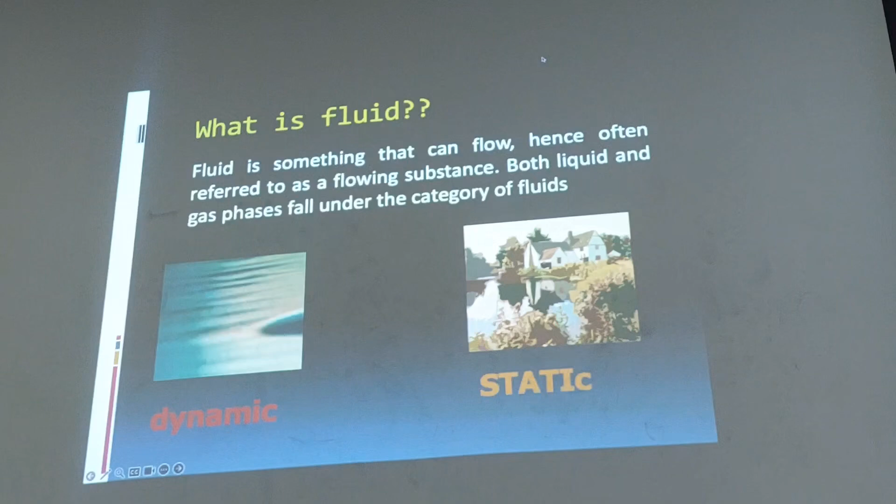The first topic is static fluid. I believe you already know about examples of fluids. Fluid consists of two types of material: the first is liquid, and the second is gas. Both of them we call fluid. So fluid is sometimes liquid and sometimes gas. Today we will discuss static fluid.

Why do we divide it into two sessions? Because static and dynamic fluid have so many different ways to explain. We know that dynamic fluid will flow according to its channel, while static fluid will remain in place inside the channel. So we can see that in static fluid there is no physical movement, but at the molecular level there is still movement of the fluid molecules, both in gas or liquid.

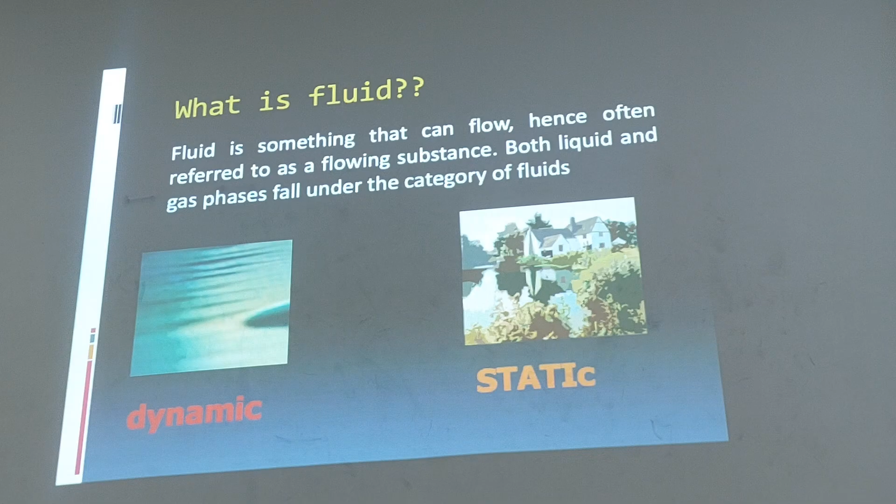For example, if you go to a nice place like a lake or a pool, and no one goes inside, we can see the water will remain calm with no flow anywhere. In this case, the fluid condition has no flow and remains in its place, so it's called static. When there is no movement, we call it static. But if there is a flow, like in a river or the sea, the fluid will be dynamic.

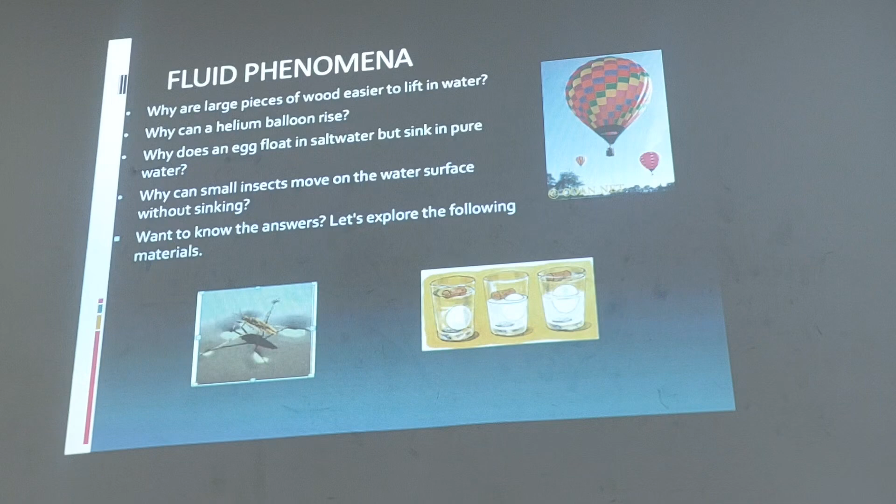The other example, if you have an egg, sometimes you put it inside a bowl or a glass. Sometimes the egg floats, but sometimes it sinks until it touches the bottom. But sometimes the egg floats or is submerged between the surface and the bottom. It depends on the egg's condition. A good egg usually floats between the surface and the bottom.

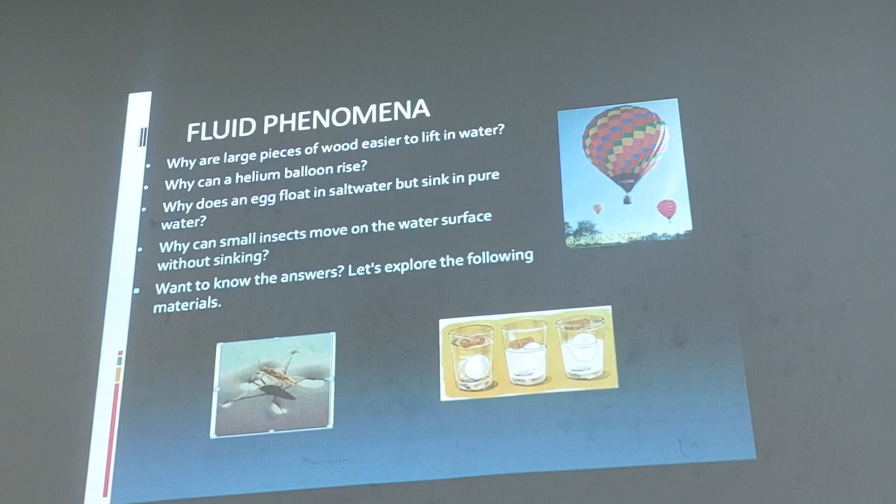But sometimes a bad egg, maybe kept too long in your house or refrigerator, becomes broken. So when you put that egg inside water, it will float until it reaches the surface. That's the simple way to separate a good egg from a bad egg. If you buy, for example, 5 kilograms of eggs and want to separate which are good and bad, just put them inside water. The egg floating on the surface is the broken one, so please do not consume it because it's already broken or expired. But if the egg sinks or floats between the surface and bottom, this is the good egg. That is a simple way.

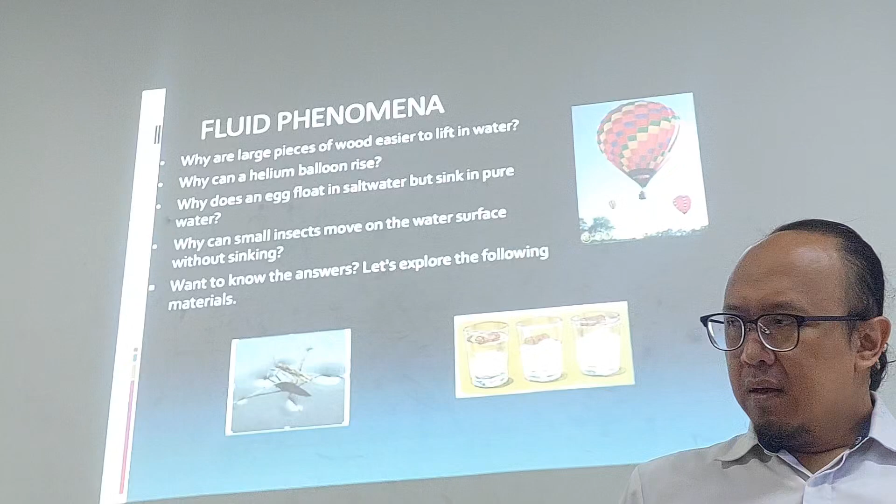The other example is some insect. I don't know the name of this insect. Long time ago, I often saw this insect in the rice field. When the rice field was filled with water for irrigation, I saw this insect floating on the surface of the water, and it cannot sink. It can move easily at the surface of the water without sinking. I don't know why this insect can do that, because if I put my leg into water, I would directly sink. But this insect can stand and stay at the surface of the water.

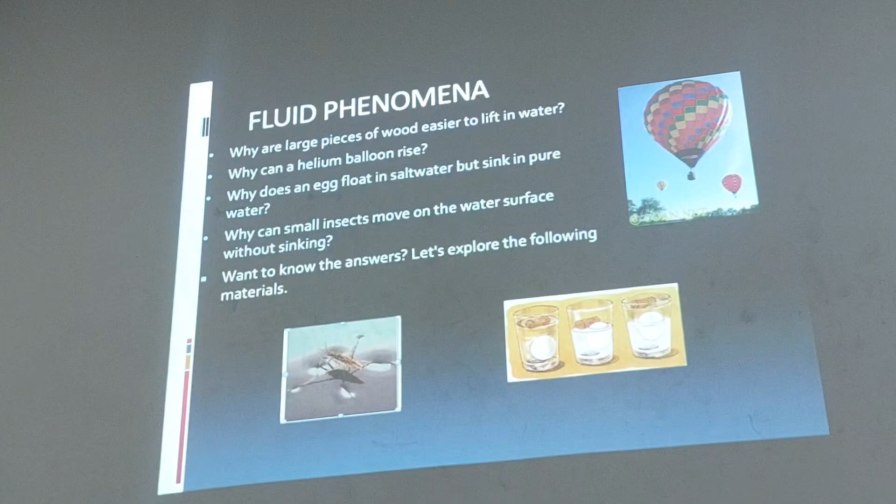So these are some phenomena of fluid. In our first discussion about static fluid, the environment of the static fluid will be limited to its place. For example, for the gas balloon, the environment of the gas is limited inside the balloon, and this volume of gas will not come out, nor will anything from outside come inside. Also, if you fill some water or fluid inside a glass, this is the limited environment for the static fluid.

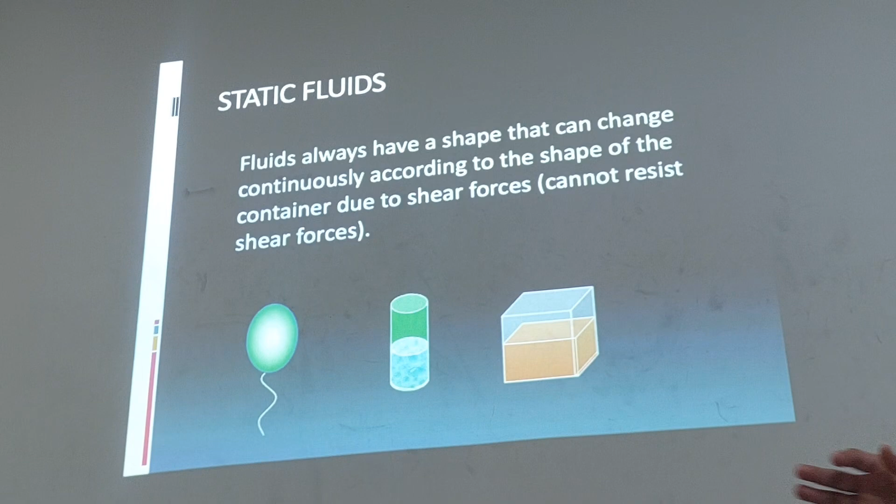The fluid can easily change its shape according to the place it's in. Also, fluids cannot resist and stay above the shear force. That's why, when we previously discussed the density of material and looked at the shear modulus of fluid, there's an empty value. The shear modulus value is empty for fluid conditions because fluid cannot resist shear force.

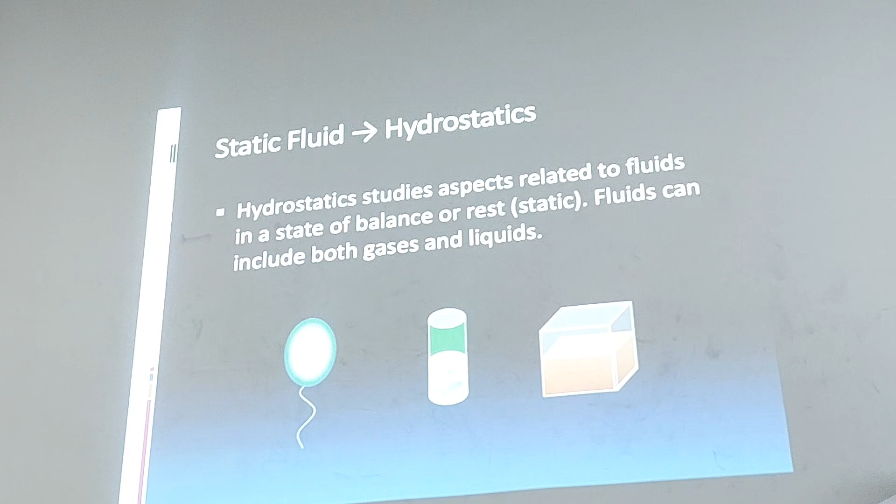Inside the static fluid, we found the potential energy about the fluid, and also some special force inside the fluid we call as the hydrostatic force. Every fluid will have this hydrostatic force.

So if we say about hydrostatic, this is force inside the fluid, and the condition of fluid is in liquid, because in gas there is no hydrostatic. So it's have a different parameter. For the liquid, why it has a hydrostatic? Because the liquid was incompressible.

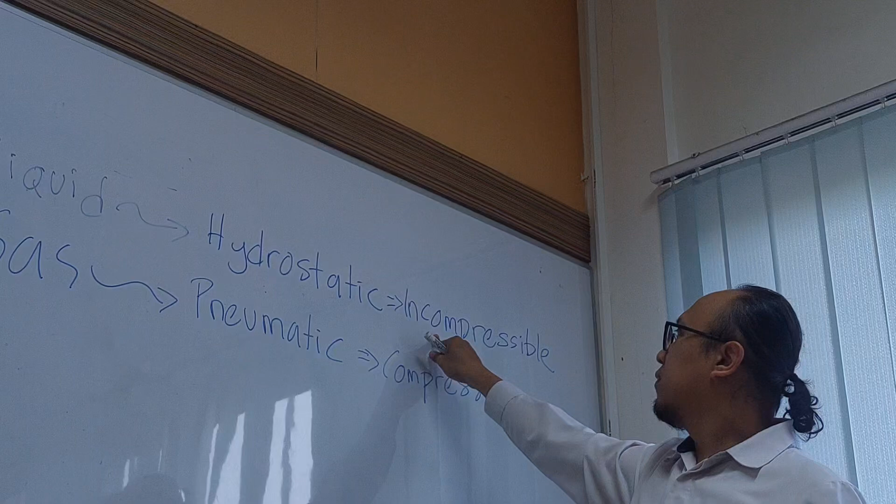Liquid was called hydrostatic because it has the parameter of incompressible condition. So when you give a force to the liquid, it will be spread or given to another area, another point, with the same amount of force. But in gas, in pneumatic condition, the gas condition was compressible, so you can fill so many volume inside a place of gas without the gas expanding anywhere.

For example, we can see your motorcycle tire or sometimes car tire. You can add some volume of gas, and the pressure inside the tire will be higher, but the volume will be similar. But if you give more and more, your tire will be higher because the tire will have high pressure inside.

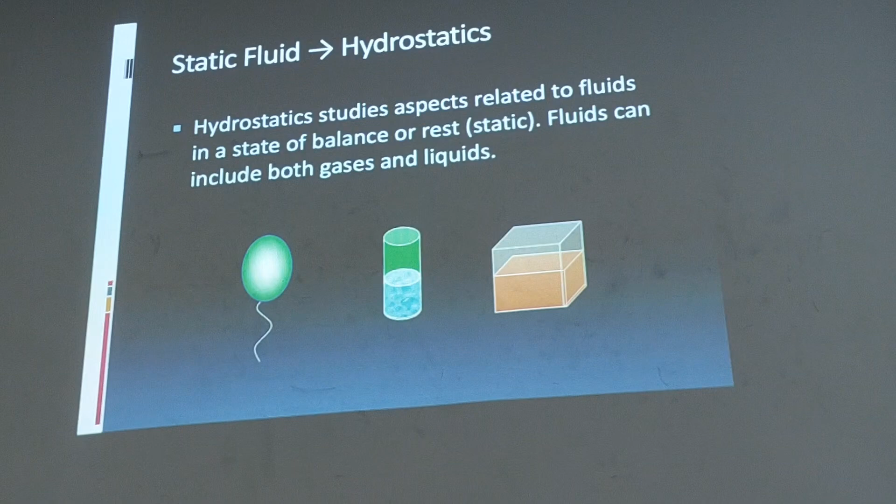But you cannot do the same way with liquid. If you fill your tire with liquid and give pressure, the liquid inside your tire will easily blow up because liquid was incompressible. It will find a way to separate and distribute the force. So this is the difference between liquid and gas.

In a liquid condition, we can verify using some experiments, and based on those experiments, we can see that the molecules of the fluid are loosely bonded to remain close together. It's easy to change the bonded molecule, but it's also easy to gather with another molecule in liquid. Also in liquid condition, when the pressure arises, it will also give the same value of force in every circumstance.

And the pressure in a liquid is perpendicular to the surface, so this is also what we call normal pressure. In gas fluid condition, the molecules can move freely, and they also easily collide, sometimes with friction, with another molecule of gas. The level of movement of gas compared with liquid is greater - the molecule is easiest to move everywhere compared with liquid.

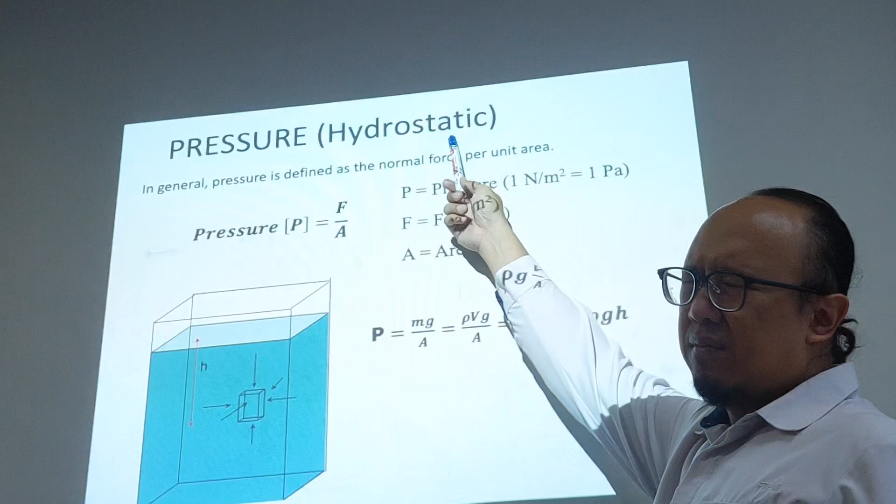In a liquid condition, we call this hydrostatic pressure. We will formulate the pressure of hydrostatic. We can get this from the basic equation of pressure, which we also used in our previous lecture class. So the pressure is equal to force divided by cross-section area. This is the basic equation.

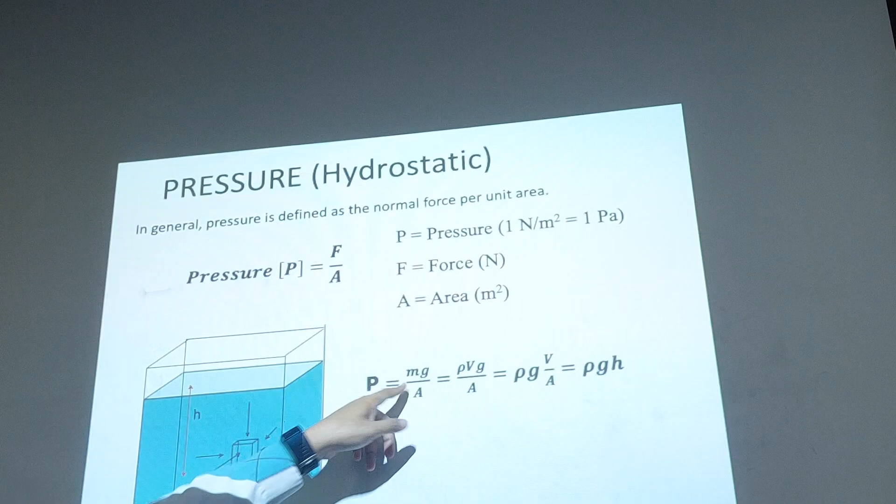From this basic equation, we can differentiate into another form, because force we can get from mass crossed by gravitation acceleration. So force is equal to mass crossed by acceleration of gravitation, divided by cross-section area. And mass we can also get from the density, which is equal to mass divided by volume.

So we can get for the mass, it comes from density crossed by volume. So we substitute the mass to become rho, or density, crossed by volume, and don't forget this is multiplied by gravitation acceleration divided by cross-section area.

Density and gravitation acceleration will not change, but volume and cross-section area sometimes change according to the place or shape. So volume divided by cross-section area gives us h, and h is the distance.

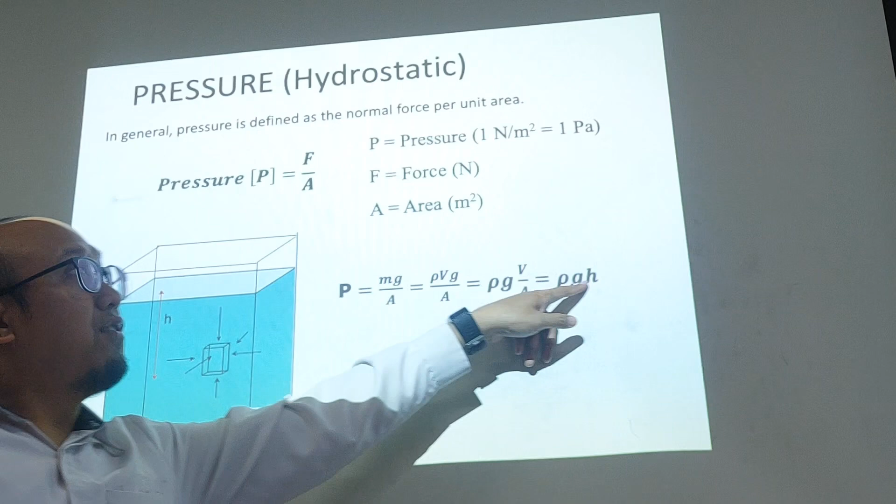But please pay attention, the distance of the hydrostatics is measured from the surface, not from the bottom. So h, this distance, is measured starting from the surface of the liquid. For example, if you put some box or material inside the liquid, at this point, the pressure you will get from the equation: density crossed by gravity and crossed by h. H is distance, and this distance is measured from the surface.

So when you change the distance of this material deeper inside the liquid, because the equation is rho, g, and h, when you move this material deeper inside the liquid, the pressure will also rise.

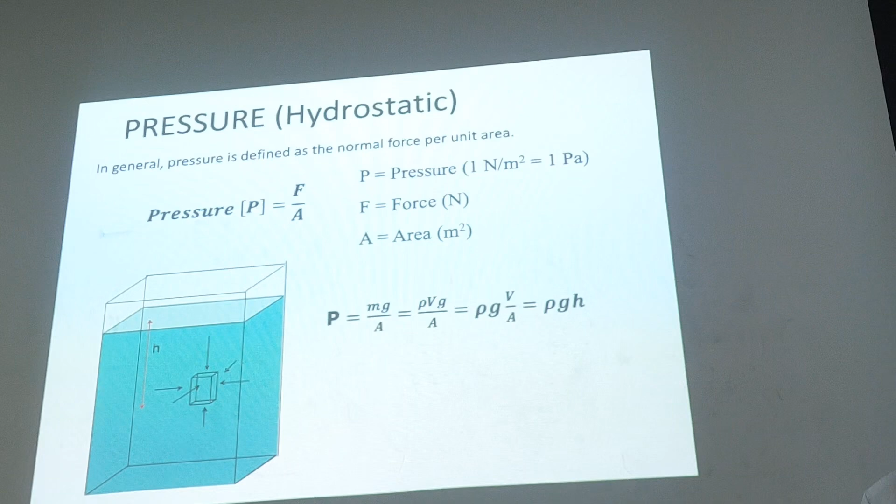That's why when you're swimming, maybe for human normal condition, maybe you can only swim 10 meters. After that, if you insist on diving deeply, you will feel pain in your ear because the pressure of the water will rise according to this equation.

So if you dive deeply, your body will have a higher pressure as you go deeper. The pressure will attack your body, especially your soft body parts, for example your ear membrane. This is one of your soft organs, and also your eyes, which is also a soft organ. So the pressure will firstly impact your soft organs.

That's why if you go diving, you have to use special equipment, for example special earplugs for diving. You also bring a pressure gauge, so you know the limit of the pressure when you dive safely, so your body will be safe when you dive.

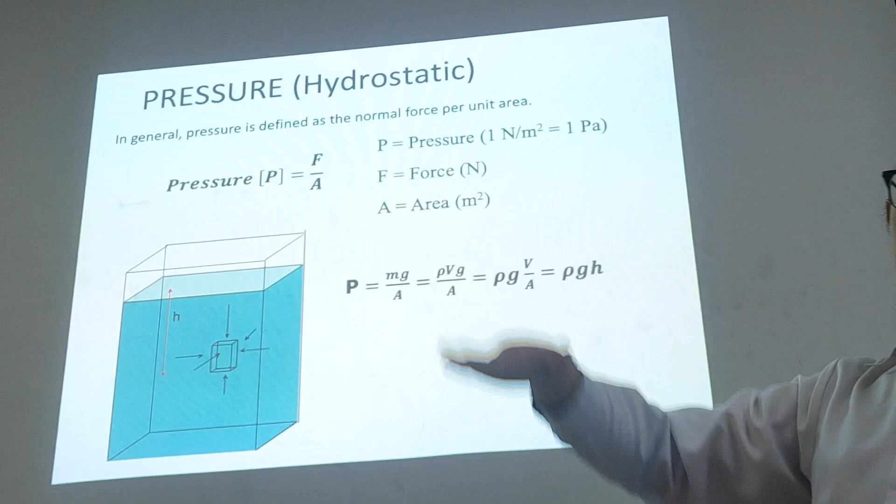Hydrostatic pressure is equal to rho, G and H. So at the same level, the same distance from the surface, the pressure will be similar. If you change position to this point, or any point at the same distance from the surface, the pressure will also be similar. But if you go deeper, the pressure will be higher than before.

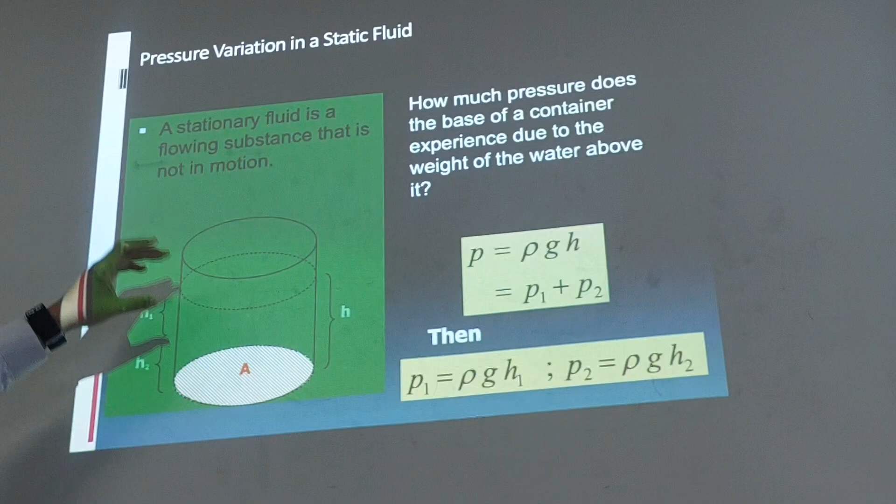Another example of hydrostatic fluid: you put two types of liquid, for example water and oil. If the oil density is higher than water, the oil will stay at the bottom and the water on top. But if the water density is bigger than the oil, the water will stay at the bottom instead of the oil.

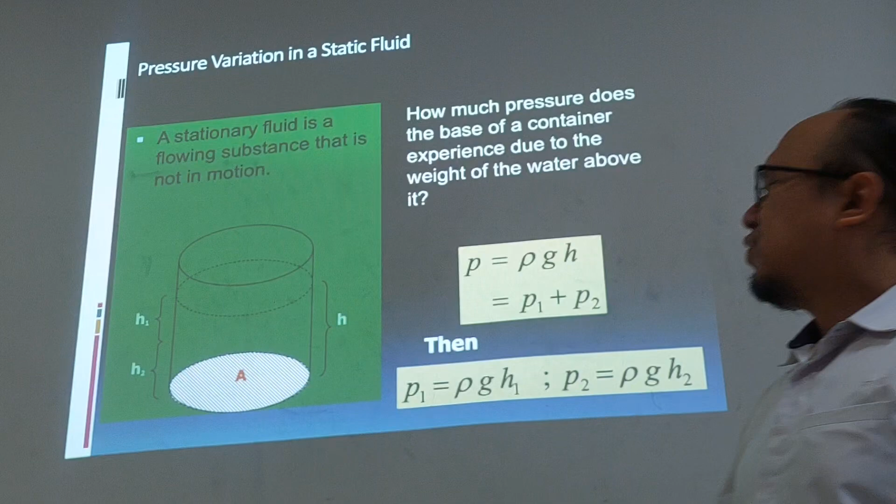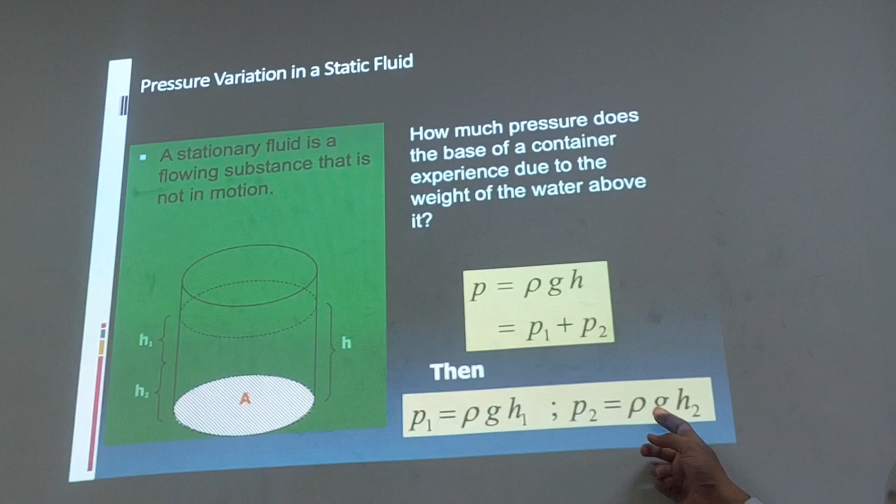In this condition, if we put two types of liquid in some place, it also has different pressure according to the depth from the surface. We know that pressure comes from rho, G and H, but since this is two types of liquid, water and oil, the pressure will be divided into two types, P1 and P2. P1 and P2 are separated by a specific distance from the surface of the liquid, so we have to calculate them one by one. For example, P1 we get from rho, G and H1, and P2 we get from rho, G and H2, because this is two types of liquid.

This is the example: a cylindrical drum with a 50 centimeter radius, the top of the drum was open, and the drum was filled with kerosene up to 80 centimeters. If the density of kerosene is 0.8 gram per centimeter cubed, it means that 0.8 is less than water density, because water density is 1 gram per centimeter cubed, but the kerosene is less, 0.8 gram per centimeter cubed, and the external pressure is 1 atm.

So this is the kerosene, and the top of the drum was open, so there is also some pressure from the atmosphere. Inside the drum, because it is filled with kerosene, this is the hydrostatic pressure, and outside is the atmospheric pressure, which is 1 atm.

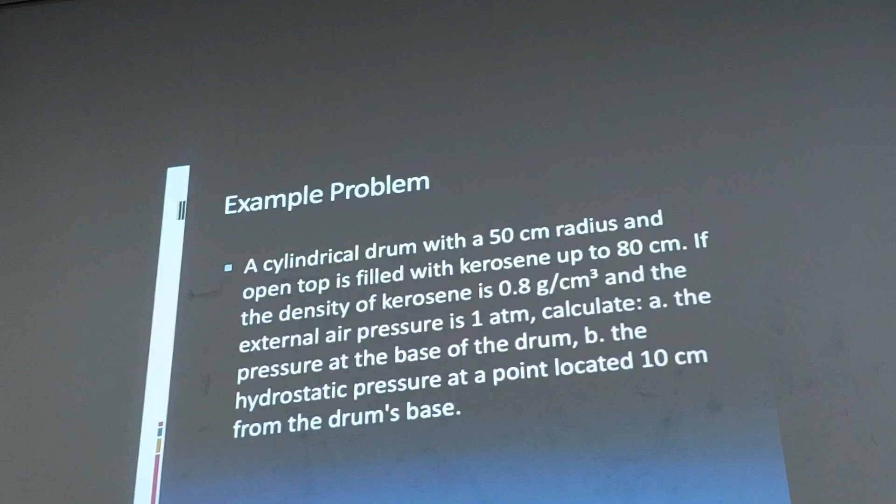Calculate the pressure at the base of the drum. So this is point A, the pressure at the bottom of the drum. And B, the hydrostatic pressure at a point located 10 centimeters from the drum base. So for example, this is point B, and point B is 10 centimeters from the bottom.

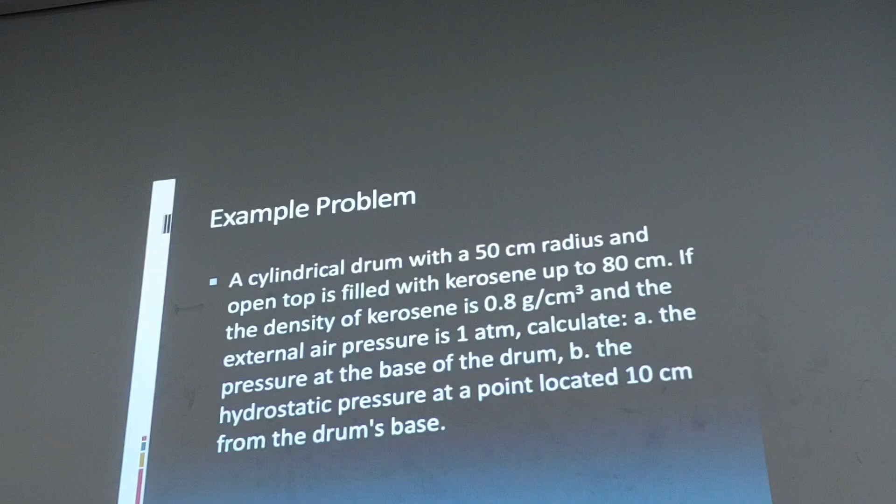So a drum filled with kerosene, and you have to find how much pressure is at point A, at the bottom, and how much pressure is at point B, 10 centimeters from the bottom. There are two types of pressure: atmospheric pressure and hydrostatic pressure.

For the answer of A, the question asks about the pressure at the base of the drum. Because if A is asking about pressure at the base, it means the total pressure consists of atmosphere and hydrostatic pressure. That's why at point A, or at the bottom of the drum, the pressure is divided into two types, hydrostatic and atmospheric pressure.

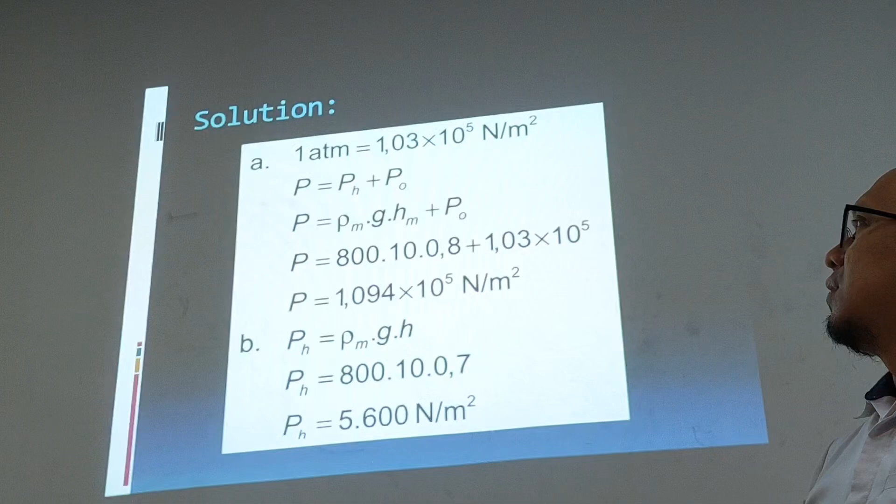The hydrostatic pressure is found from rho, G, and H. Rho is the density of the kerosene, which is 0.8 gram per centimeter cubed, so we transfer into kilogram per meter cubed, and it becomes 800 kilogram per meter cubed. The gravitational acceleration we use is 10, and the height at the bottom is 80 centimeters.

So we must change to meters, so it becomes 0.8, plus 1 atm, which is equal to 1.03 multiplied by 10 to the power of 5.

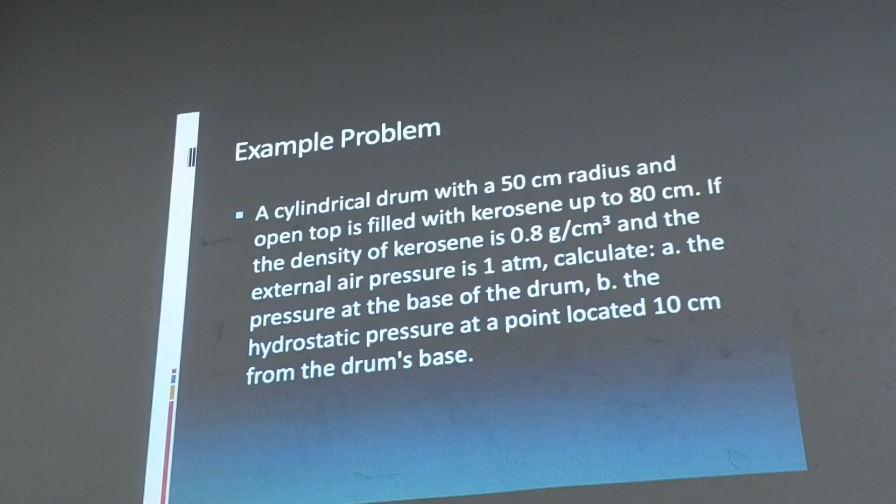And the second, B, the hydrostatic pressure. This is only hydrostatic pressure, meaning only the pressure inside the liquid. No need to calculate with the atmosphere. We're only asking about the hydrostatic pressure at a point located 10 centimeters from the bottom. So we can use only the hydrostatic pressure formula: Rho, G and H. Rho is 800, similar to this one, multiplied by 10.

This is the gravitational acceleration. And H is 0.7. Why 0.7? The point is 10 centimeters above the base, measured from the bottom. Or from the surface? Because the point from the bottom up is 10, and we would make it like 80 minus 10, which equals 70. Because we should measure from the surface downward, not from the bottom up.

So just remind that H will always be measured from the surface, not from the bottom. That's why if this point is 10 centimeters and the total depth of kerosene is 80 centimeters, H equals 80 minus 10, so it will be 70 centimeters or 0.7 meters.

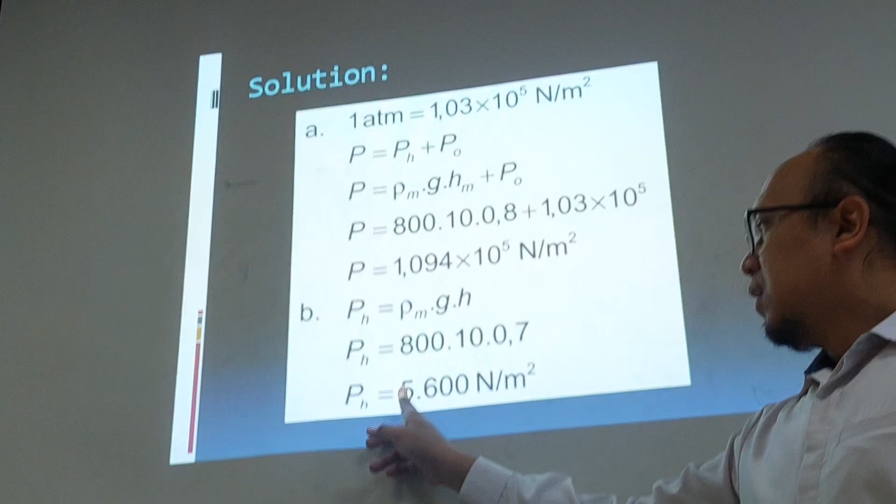So the hydrostatic pressure at this point, point B, will equal 5,600 Newton per meter square. So this is the pressure at point B.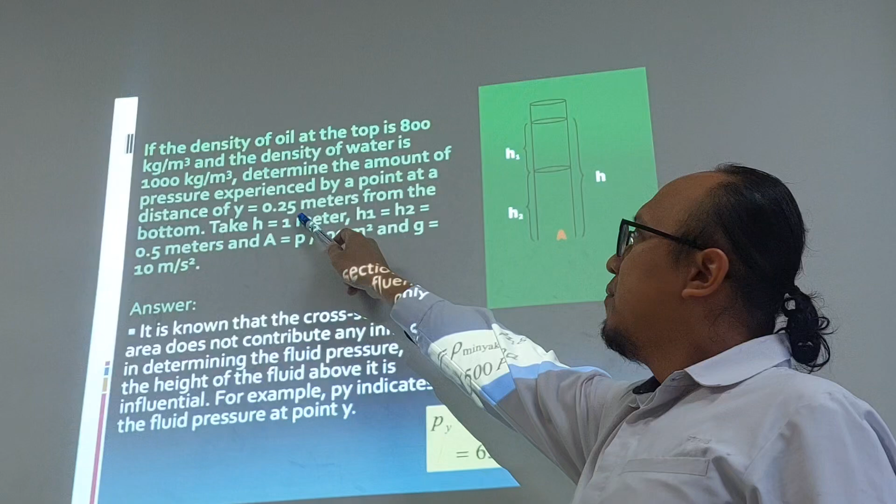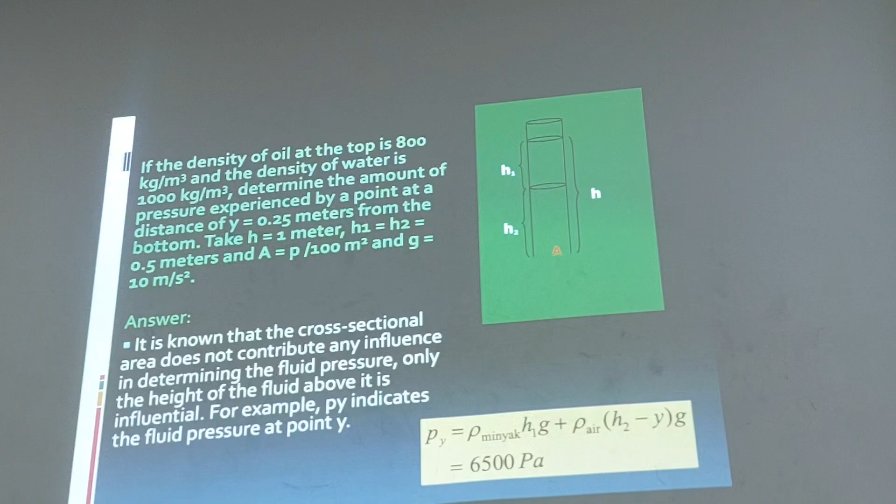And take H1 as 1 meter. Take H as 1 meter, H1 and H2 equal to 0.5. So this is the total H, and this is half of H, same length, same depth, 0.5. And the cross-sectional surface area of this glass or cylinder is equal to A, equal to P per 100 meters square, and the gravitational force is 10 meters per second square.

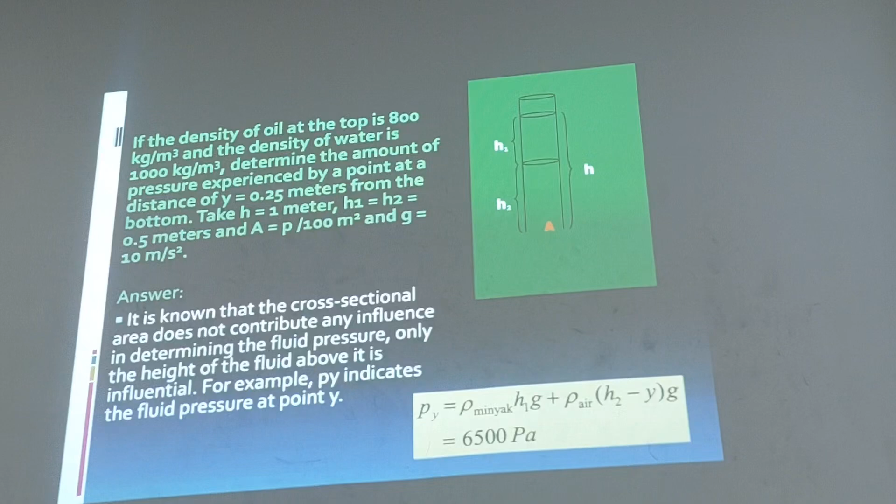So the question asks to determine the amount of pressure at the point 0.25. The point is 0.25 meters.

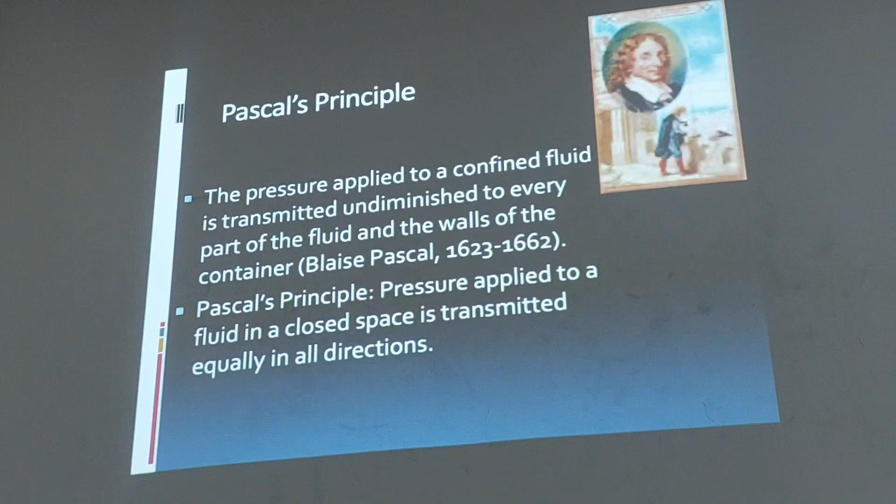One of the scientists to explore the liquid phenomena is Pascal. This scientist had some important results from his study. The first result: the pressure applied to a confined fluid is transmitted undiminished to every part of the fluid and the wall of the container. This is according to Pascal's experiment. He said that if you give some force to a liquid, the force will be transmitted everywhere inside the water with the same value.

That's why we call liquid incompressible, because we cannot give compression to the liquid. The liquid will find a way to separate and distribute the compression. This is also a finding from Pascal. He found that if you give pressure to the liquid, the pressure will be transmitted into every part of the liquid and also to the wall of the container, in the same value.

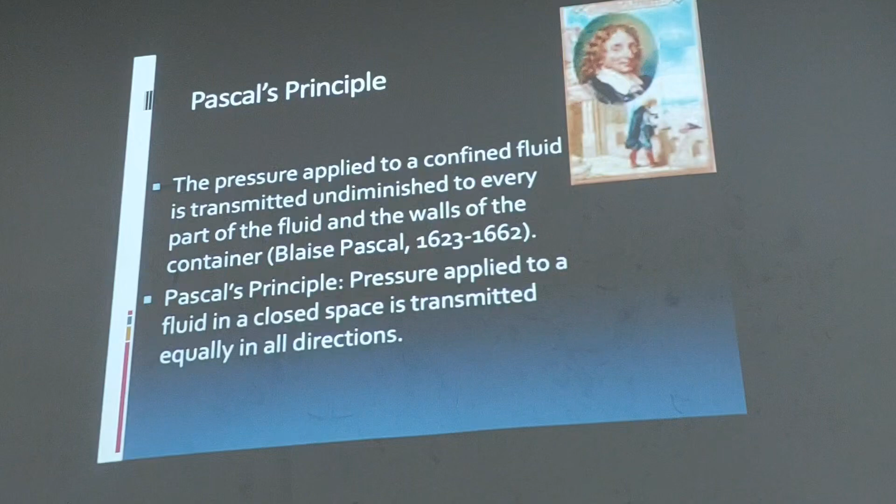And according to Pascal, pressure applied to the fluid in a closed space is transmitted equally in all directions. This means that if you give 5 Newtons of force, the same value, 5 Newtons, is also transmitted everywhere inside the fluid liquid. This is according to Pascal's study.

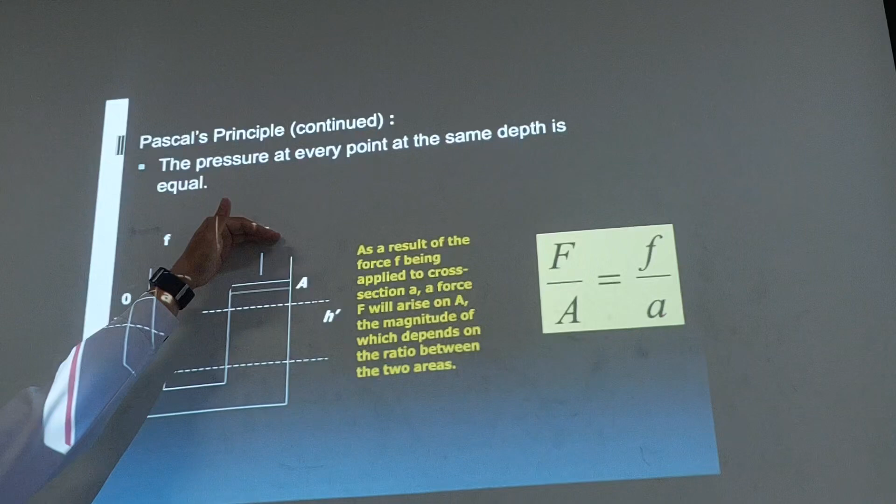That's why if you make 2 channels in a place and fill the channels with liquid, for example water, if you give pressure in the small channel, it will come out in the other channel. Also, if you give pressure from the bigger side of the channel, the same amount of pressure will come out from the small one. So this will be the same pressure. Pressure in 1 equals pressure in 2. 1 is the small one, 2 is the biggest one. So this is the small channel, and this is the bigger one.

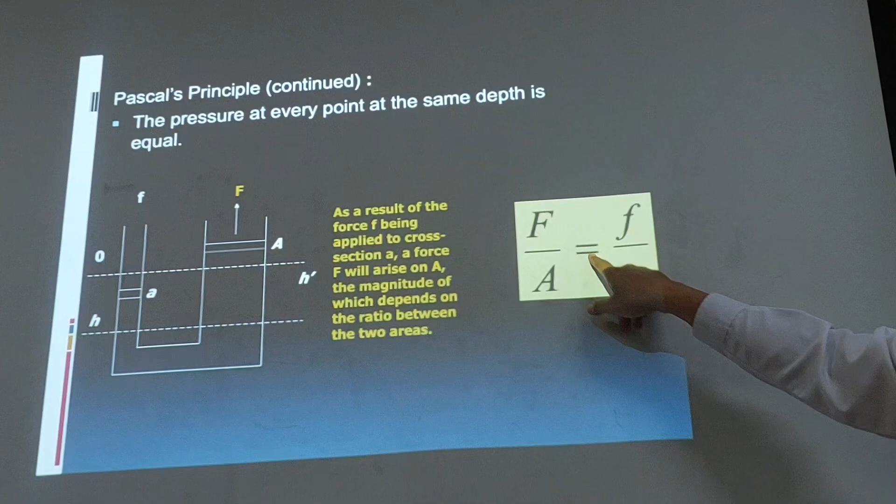And because pressure equals F per cross-sectional area, the force you give is an external force. So if you give force to this side, the other force will come from the other channel. So F per A will equal small f per small a. Small f is in the small channel, capital F is from the bigger channel.

Small f was divided by cross-sectional area. This is the cross-sectional area for the small channel, and this is for the bigger channel. Using this equation ratio, you can get how many force in every point inside the channel. You can use this equation ratio.

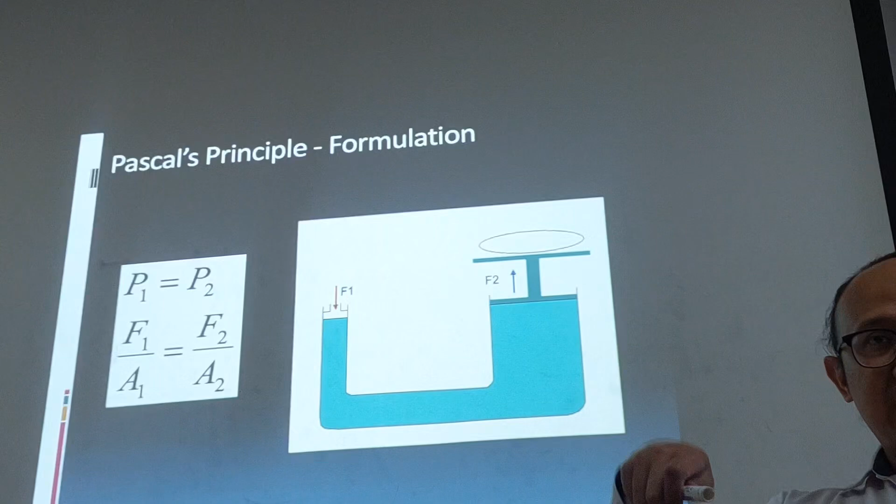This principle nowadays is used in hydrostatic equipment, for example the hydraulic jack. If you have a motorcycle, you don't need a hydraulic jack. But for your car, if you change your tire because it's flat, you need the hydraulic jack to help you lift your car and change your flat tire.

But sometimes modern cars now don't use a hydraulic jack because the hydraulic jack is expensive but powerful, and also we have to maintain the fluid inside the hydraulic jack and some parts of it. So nowadays modern cars don't use hydraulic jacks. They changed to using a mechanical jack.

Usually the shape of the mechanical jack was like this. Now modern cars use this type of jack. This is not a hydraulic jack. This is only a mechanical jack.

You just put this jack at the bottom of your car, and you screw this side usually using a long bar. You grab this bar, so this mechanism will go upside and downside.

And the principle of the hydraulic jack uses this Pascal principle. You give a small force into the small chamber. So if you give a small force in this area, the small force will be transmitted into the bigger chamber.

So if this is the small chamber, by pressing the lever you give the small force in this chamber, and the bigger force will become at the bigger chamber. Using this Pascal principle, you give the small force in the small chamber, you get the bigger force in the bigger chamber. So the small force, maybe normally for a human, is given by your hand.

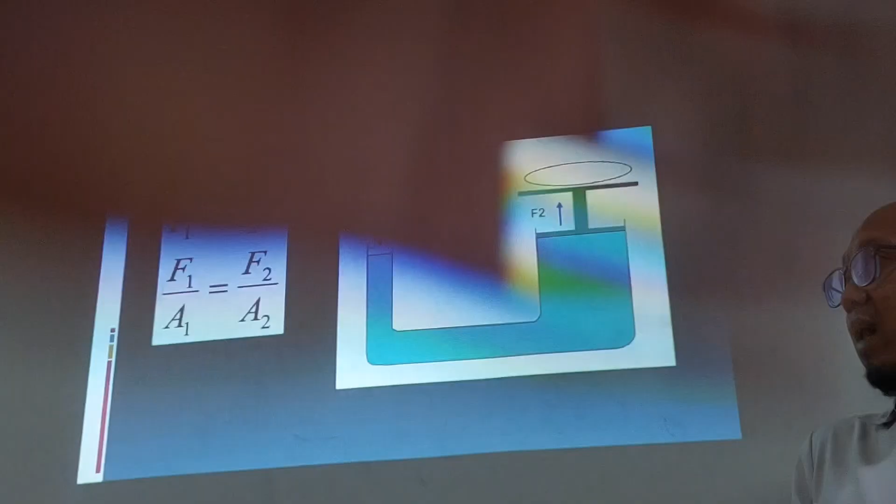But the force coming out of this chamber will be maybe 10 times or more than the human force on this side. So it can lift heavy things, for example a car. The average weight of a car now is maybe almost 1 ton. Some big cars maybe weigh 1.3 tons, but a small car maybe maximum 1 ton or less.

So you give small force, you will get a bigger force. You can lift bigger equipment such as your car, so you can easily change your tire. Without these tools, mechanical or hydraulic jack, maybe you cannot change your flat tire. It's heavyweight, if you lift by yourself maybe you cannot. Even I cannot lift my car. I need special help to change the flat tire.

Okay, we go to the next. In a liquid condition, there is some hydrostatic paradox. This was also found by Blaise Pascal.

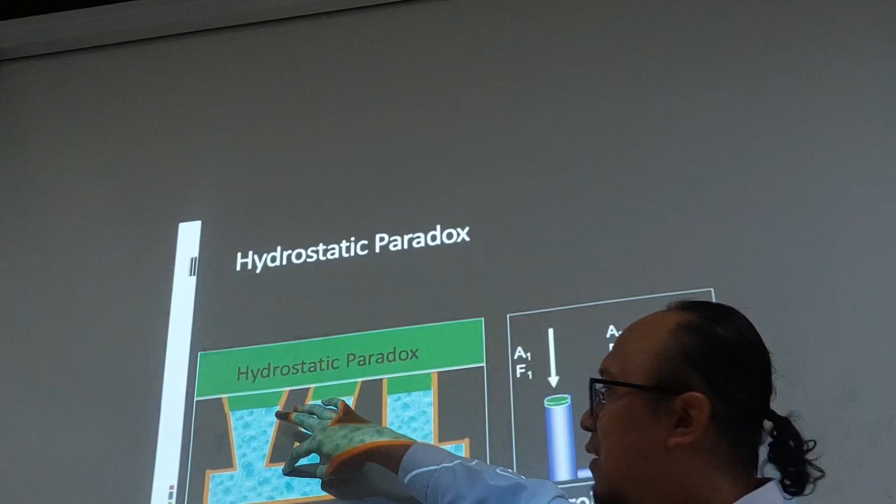If you have some chambers like this: in this area you have a triangle or taper chamber, on the other side you have an oblique chamber like this, and on the other side there is a normal chamber. If you fill some liquid, for example water, in every chamber, you will get that the surface level of the liquid will be the same, even if...

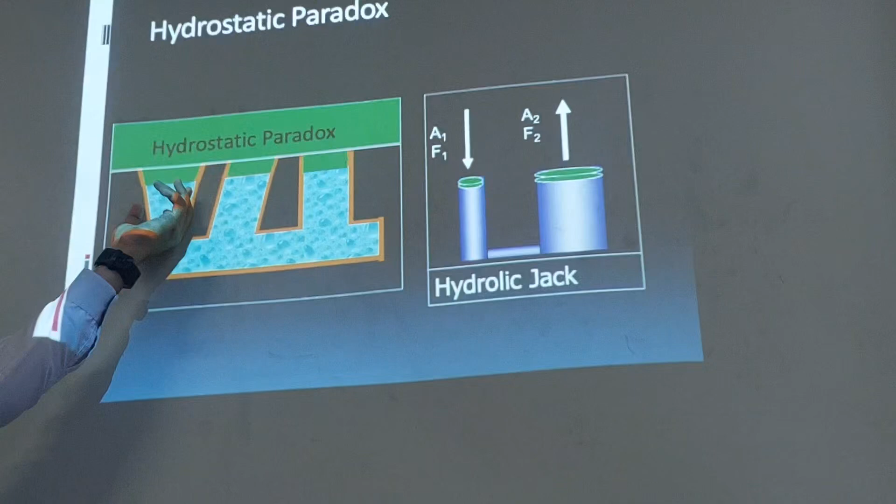...the shape of the chamber is different. The surface of the water will stay the same, even if this chamber is tapered, this is oblique, and this is normal, vertically straight. All the surface levels will be similar. So Blaise Pascal called this condition the hydrostatic paradox.

And because of this phenomenon, we can use it usefully, especially for building a house or office or big building, using this hydrostatic paradox.

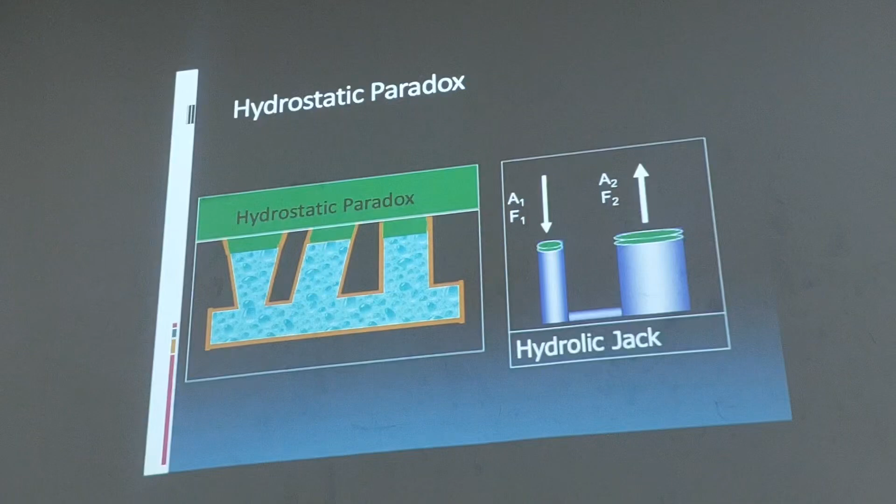So this is the simple or easy way to measure the same level of a building. For example, if you want to give some mark in this area, you want to put some ceiling from this side until that side and that side, you have to know what the level is.

Measure from the bottom of the tile. Sometimes there is a difference because sometimes the building tile may have some angle.

So if you measure the ceiling from the tile, the height of the ceiling will be different in different places. So how do we get the same level of the ceiling? By using this phenomenon, sometimes the carpenter or some building expert uses a small elastic pipe filled with water.

For example, I bring one of the pipes, an elastic pipe, and my friend holds the other side, also bringing the same pipe. So you have a long elastic pipe. What do we call this elastic pipe? In Indonesia we call it slang. What is it in English? Hose. Elastic hose, yeah.

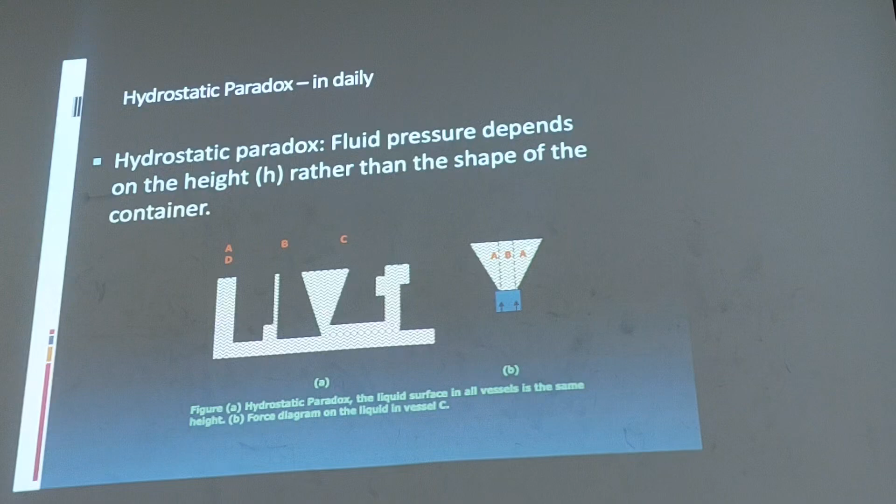So the liquid or water has a special ability to help humans, especially to measure the level in hydrostatic conditions. Sometimes we use this to build buildings or other constructions, measuring the level of the construction using this hydrostatic pressure. This is one of the liquid's abilities.

The other ability of liquid is its special ability to identify the material inside the liquid. Humans don't have this special ability.

For example, if I give you two metals and ask you to identify what kind of metal they are, maybe you can guess by seeing the color, the texture, or some mark on the metal. But you cannot give a specific value or parameter for this metal. Liquid can do that. It can differentiate, it can tell if this is the same metal or a different metal. Liquid can do that.

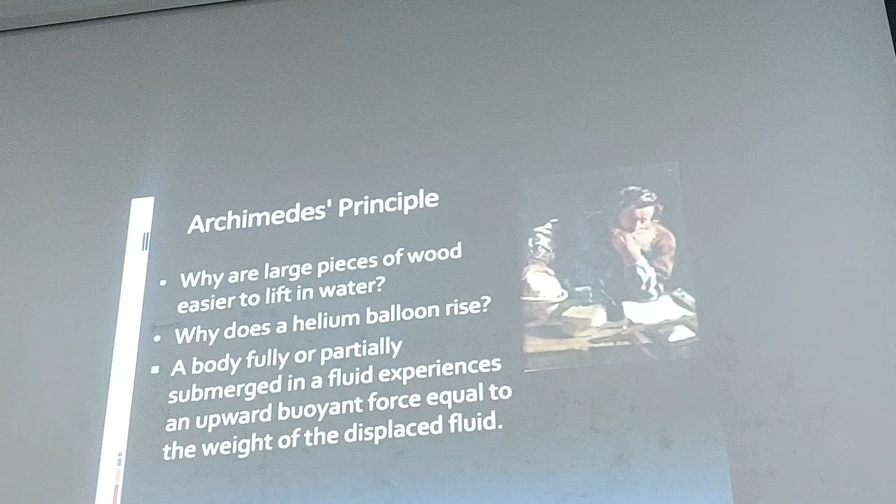So I will give you the story. Oh, the other scientist, besides Pascal, there is Archimedes. Archimedes was also interested in studying liquid phenomena, not only liquid but also gas. According to Archimedes, every liquid has a special force.

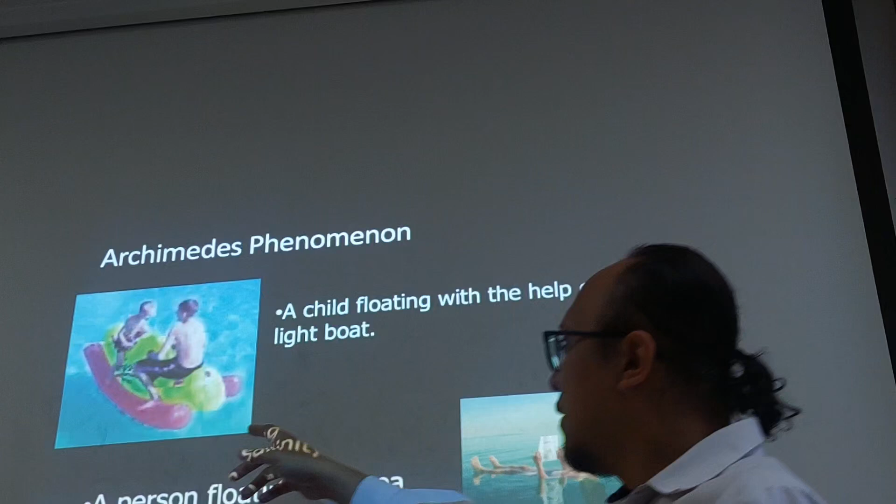He called this force the buoyant force. So every liquid has a buoyant force. For example, a person swimming can ride into a small boat and float at the surface of the water. This can happen because the water has a special force to lift you up to the surface of the water, and this force is called the buoyant force.

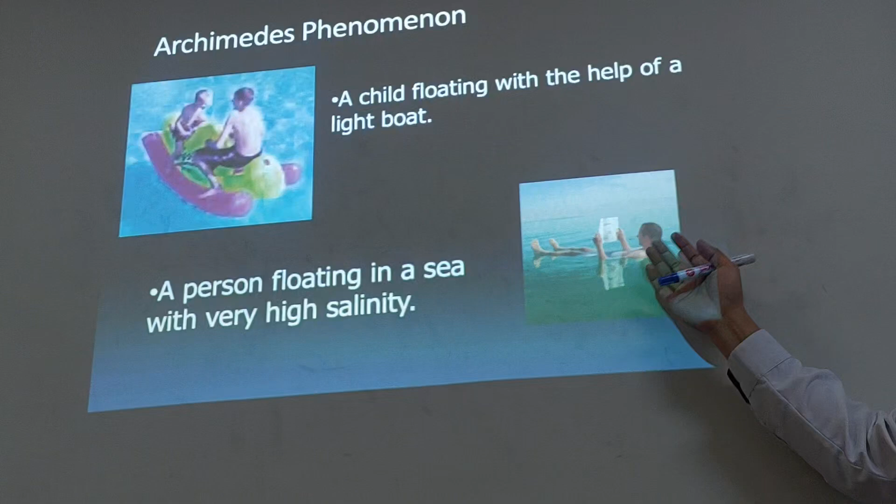And also, if you go to the Dead Sea, which has the highest salinity level, the water there is very salty, and I think no animal or plant lives inside the Dead Sea because the salt level is very high. So a person swimming at the Dead Sea finds it easier because the body floats easily due to the highest salinity level. It means it's very, very salty. You cannot drink from this sea.

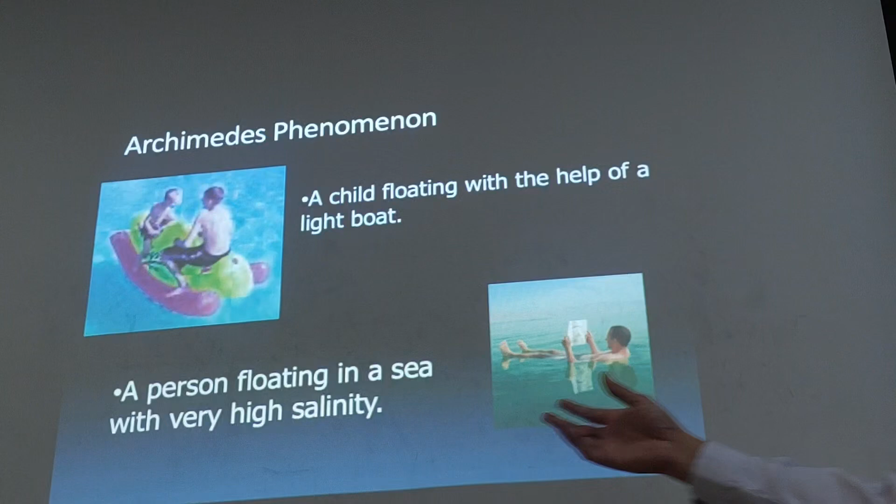In high salinity especially, a person finds it easy to swim because the buoyant force is very high. So every liquid has a buoyant force. How do we measure the buoyant force? Buoyant force is equal to Fb, it means the buoyant force.

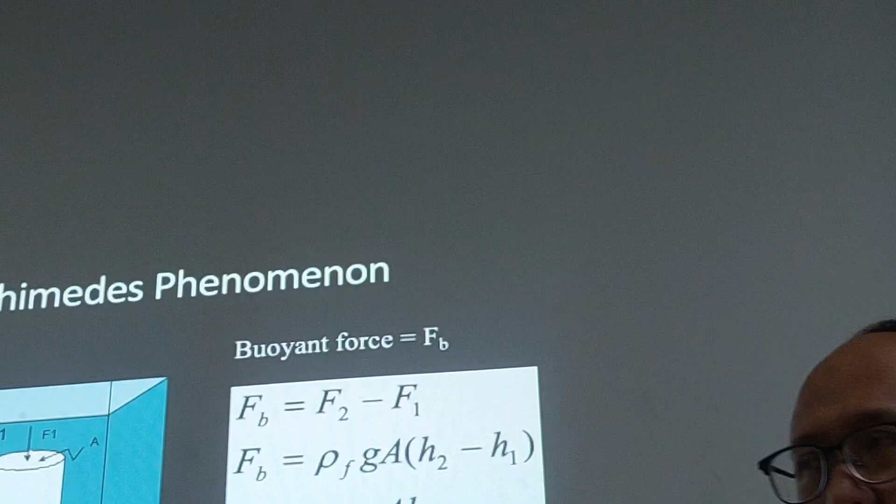According to Blaise Pascal, this is his formulation: rho, g, and h. This is the formulation of Blaise Pascal for hydrostatic pressure. But for the buoyant force, it's almost similar: rho, g, and a and h, where a and h is equal to the volume. So it's also rho, g, and volume.

This is the buoyant force. But the volume changes into cross-sectional area multiplied by the depth. So the buoyant force is equal to rho, g, and volume. This is based on Archimedes' study.

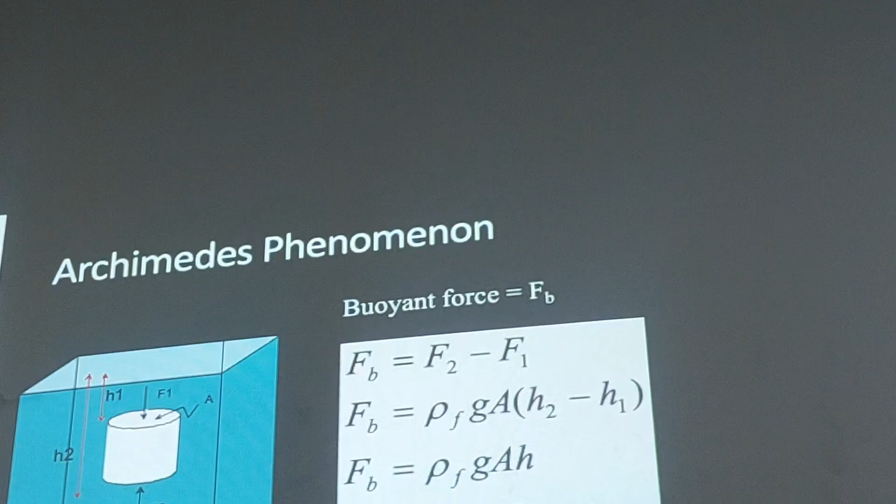Archimedes was asked by the king. There is a king, and Archimedes was asked to find out whether the newly made king's crown was really made of gold or not. The king wanted to make a new crown for himself, so he asked craftsmen to make the crown from pure gold. The king gave the gold to the craftsmen to build it into the crown. After several times, the craftsman comes to the king and gives him the new crown.

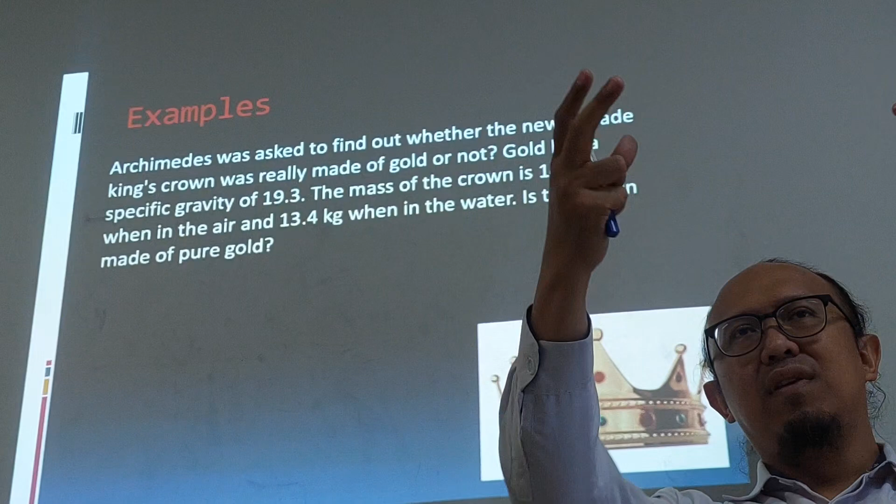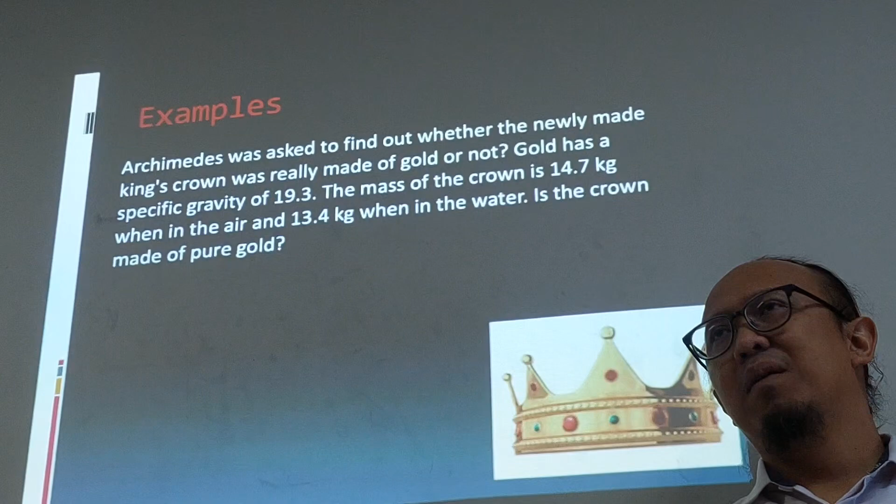But the king had doubts. He was afraid that the new crown was not made from the pure gold he gave to the craftsman. The king wanted to prove whether this crown was the same as the gold given to the craftsman or not. So the king called Archimedes: 'Archimedes, please come here, I need your help. Please check this new crown made by the craftsman. Is it the same gold, the same weight, as the gold I gave to the craftsman? I am afraid that some of my gold was taken by the craftsman and not all of it was made into the crown.' So the king called Archimedes to prove this about the gold.

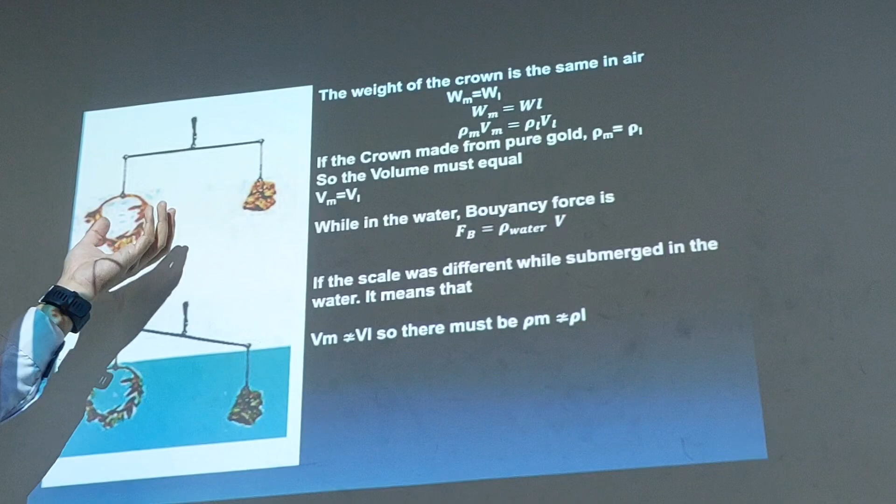So Archimedes, using his knowledge about buoyancy in water, tried to explore and prove whether the crown and the gold were the same or not. First, he measured the gold using a stick, the same stick. He put the crown on the left side and the gold on the right side, and tried to scale whether it was the same weight or not. The scale was hanging at the end.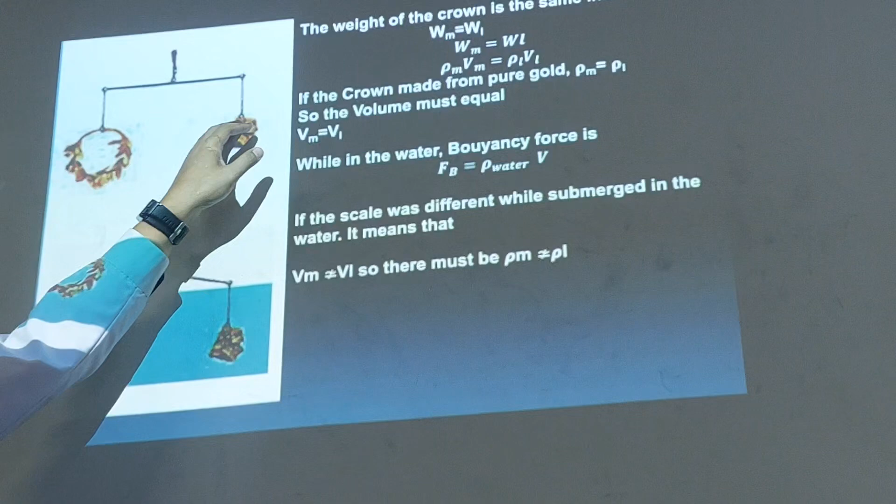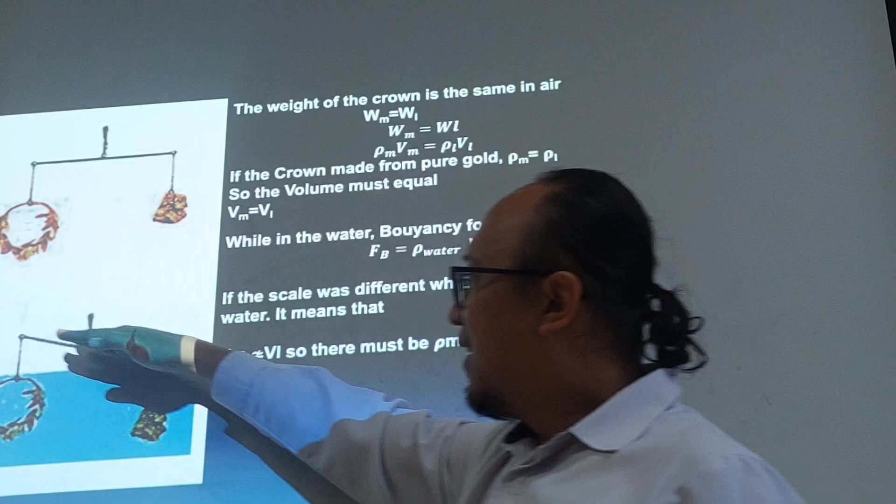At first, when the crown and the gold were placed on the scale, it balanced, showing that the weight of the crown and the gold was similar. After that, Archimedes took some water and put the scale into the water, placing both the crown and gold inside the water. When the scale and these two things were put into the water, Archimedes found that the weight of the gold was bigger than the crown, because the scale was not balanced.

It showed that the weight of gold is bigger than the weight of the crown. So he proved that water has a special ability to identify every material in this world. It can give a special value of buoyant force, because buoyant force equals rho, g, and v. This v belongs to the material, and this rho belongs to the liquid. So if the volume is different, the buoyant force will also be different.

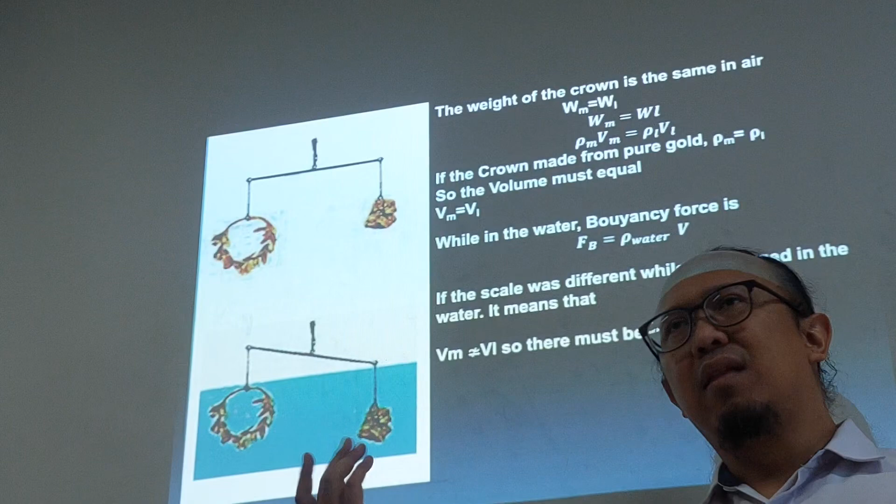That's why when the king's crown was put into the water, the scale became unbalanced and showed that the gold is heavier than the crown. It means that the craftsman was cheating. Some gold was taken by the craftsman, and only the rest was made into the crown. So Archimedes could prove that the crown contained less than the original amount of gold.

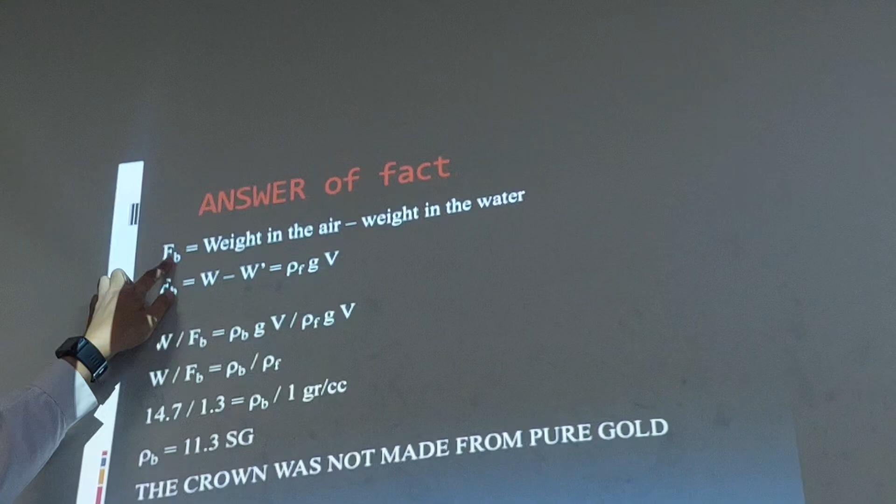This is using the equation: buoyant force applied to the crown and to the gold was different. This difference is the weight in air minus the weight in water. He could prove that if the gold and the crown were made of the same material, this difference would be equal to zero. But if different, the scale would be unbalanced.

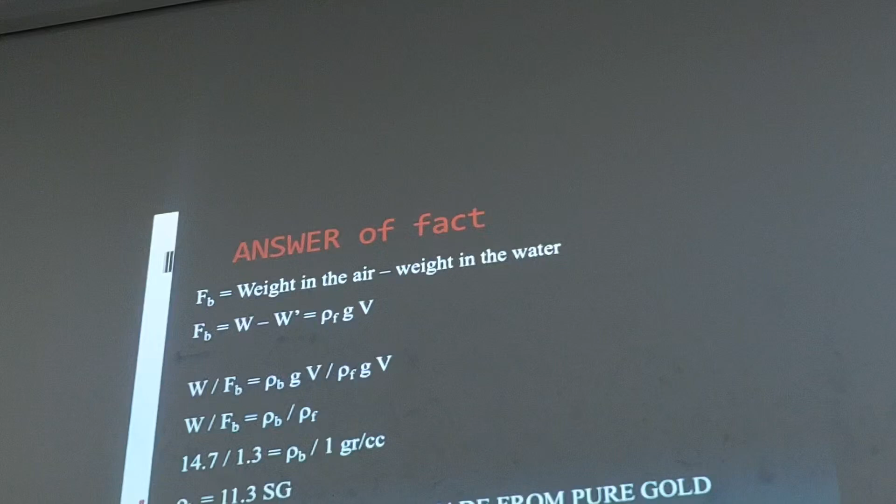That's why we can prove, according to modern science, that the density was equal to 11.3. This means the king's crown was not made from pure gold, because when he compared the density of the fluid displaced with the density of gold, he found they were different, since the density was equal to 11.3 and not the actual density of gold. This is using modern science, but long ago, Archimedes could not do that.

He only proved this using water phenomena. If you put something inside water and the scale becomes unbalanced, it means this is not similar material.

So sometimes making a crown involved mixing gold with some iron or another additional metal, meaning it is not pure gold.

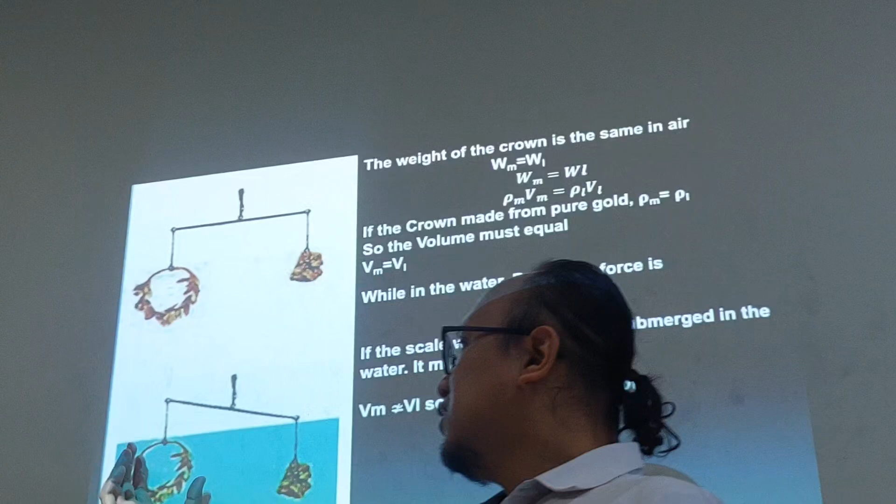Also in Archimedes' study, he found the same result as Pascal. He found that when some material is put inside water, sometimes it sinks, sometimes it floats, and sometimes it submerges.

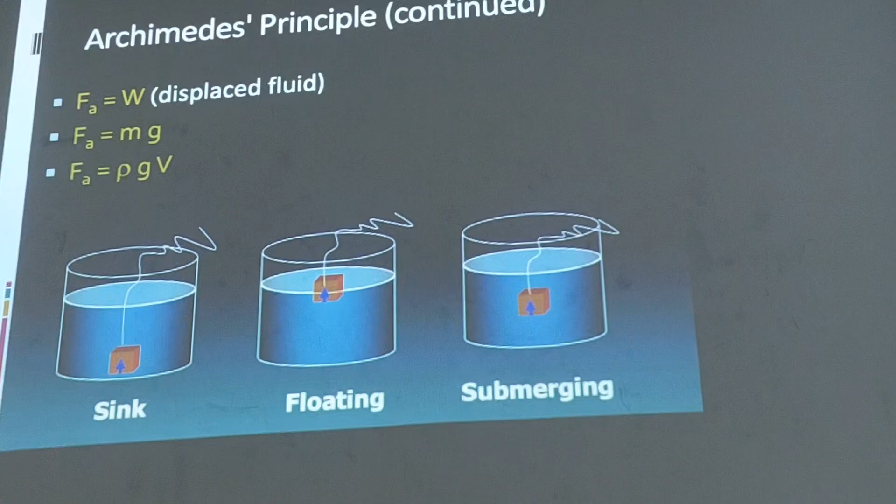Submerging means it stays placed between the surface and the bottom. It does not touch the surface and also does not touch the bottom, so it stays between them.

This is similar to Blaise Pascal's study. So according to this condition, he found the Archimedes force in a sinking condition.

In a sinking condition, he found that the weight is bigger than the Archimedes force. In a floating condition, the weight is less than the Archimedes force.

And in a submerging condition, the weight and the Archimedes force are equal. That's why the material stays floating inside the liquid.

Then, before the last topic, the last material is also the third ability of liquid. It is called surface tension.

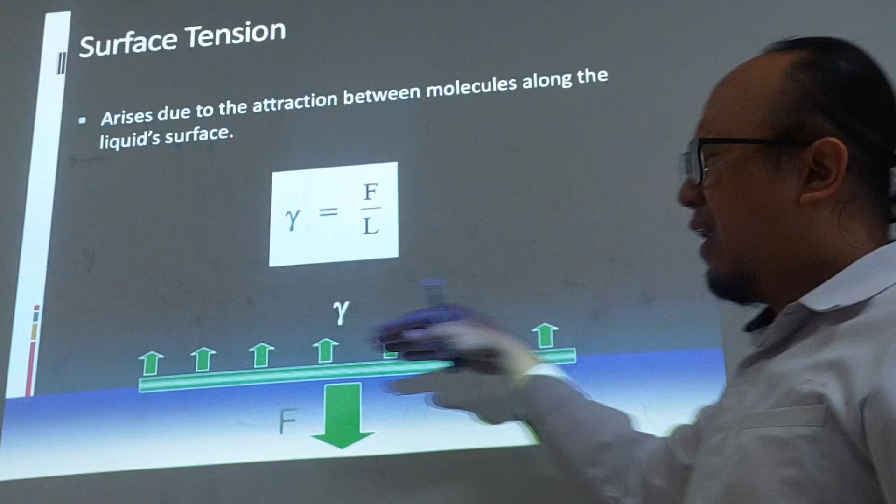So gamma indicates the surface tension of the liquid. Surface tension will be

interact with the molecules, especially at the liquid surface. So for example, if some part is put at the surface of the liquid, the surface of the liquid

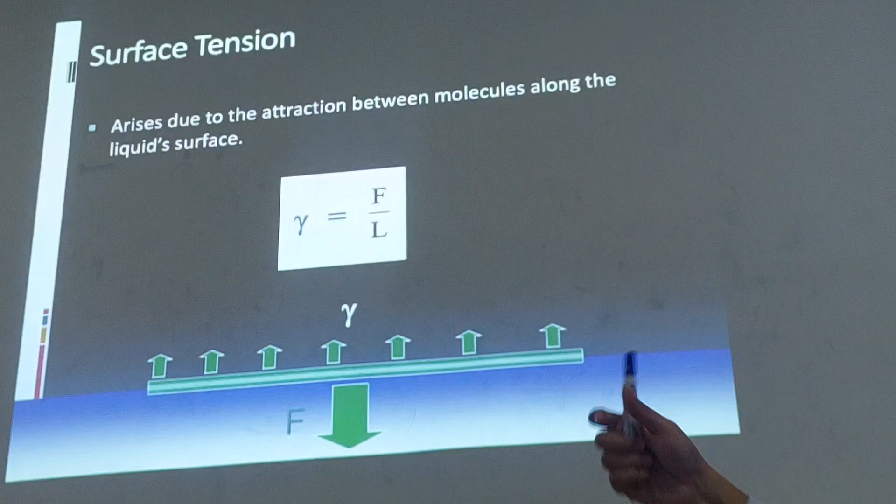will give a special tension to prevent this part from coming inside the liquid.

But the surface tension is very small, depending on the type of liquid. So the surface tension will keep this material from sinking inside the liquid.

Using this formulation, gamma equals F per L, so if the length L is much bigger, gamma will be smaller, meaning the surface tension becomes smaller.

And the surface tension is highly associated with the viscosity of water.

Using this, for example, if the material's shape is like a ball or circle, then the

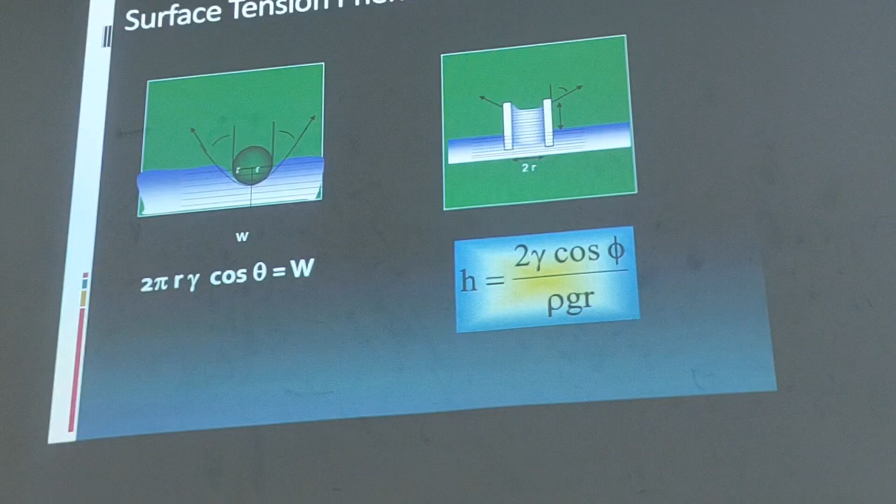weight W equals 2 pi r, where r is the radius of the ball, multiplied by the surface tension gamma and cos theta.

And using this same formulation, we can get the height of the

viscosity condition, or we can say this is the capillarity ability of water.

Water also has the ability to fill into small areas. This is called capillarity.

So a liquid with high density sometimes cannot enter small areas because of the surface tension condition.

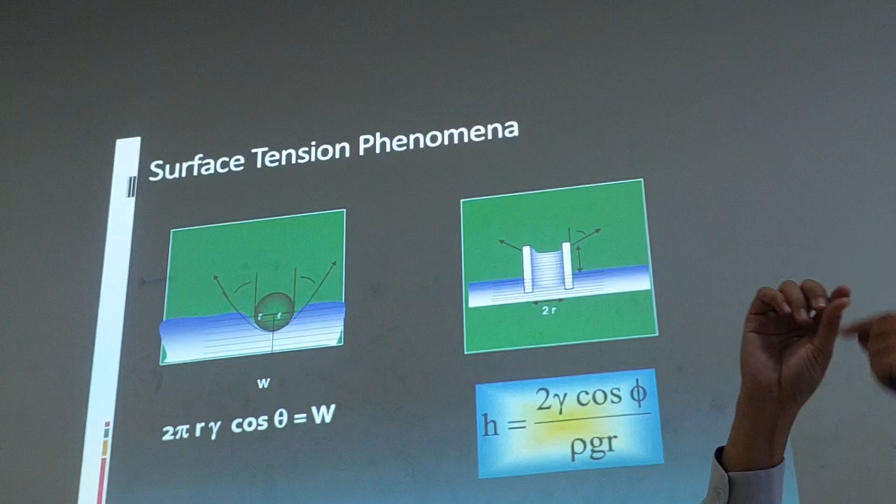But a liquid with less density easily comes into a small hole. It's easy to enter and fill into a small hole,

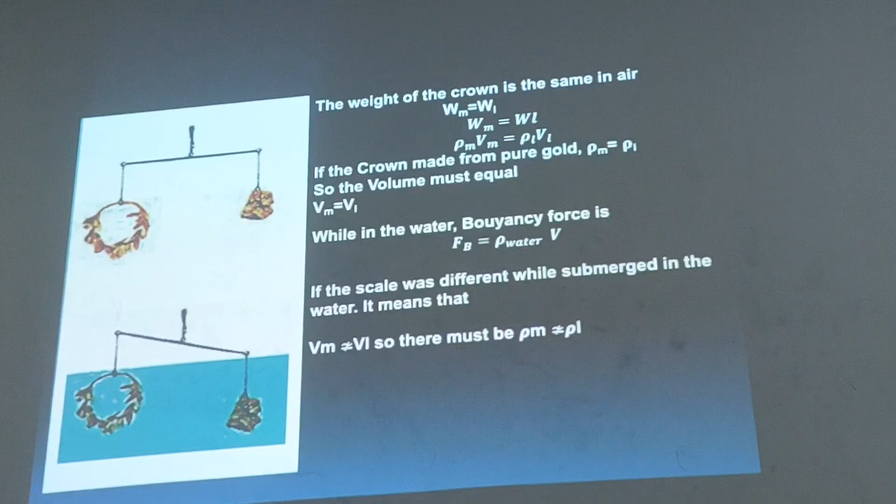So if you put gold, iron, magnesium, or any other metal, this liquid can identify what material comes inside it.

Then it can give the specific buoyant force

to rise, to lift this material. So that's the second ability of liquid, and this is a natural

ability. And the third one is the surface tension of the liquid.

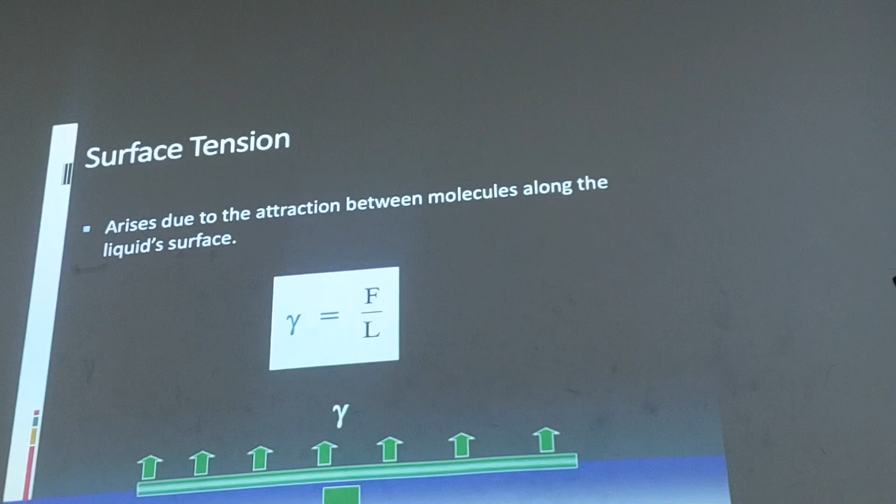We associate the surface tension with the viscosity and capillarity of the liquid. So maybe liquid is a

dead material. It doesn't have any soul like us. We have a soul; this is just a body, but inside we have a soul.

But in liquid, there are special abilities that humans don't have.

It has three special attributes: hydrostatic, buoyant force, and surface tension.

Yeah, okay. Yes, go ahead.

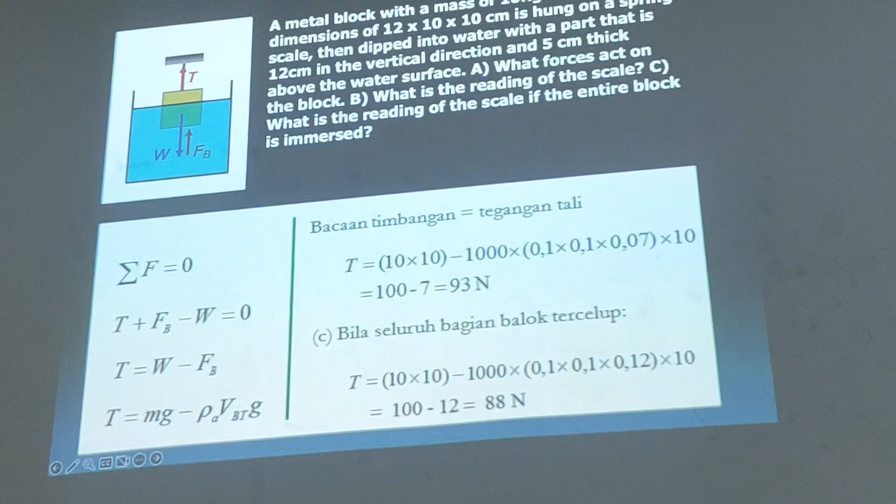So I think this is our topic for our class today. We discussed static fluid, so next week we will discuss dynamic fluid.

Do you have any question?